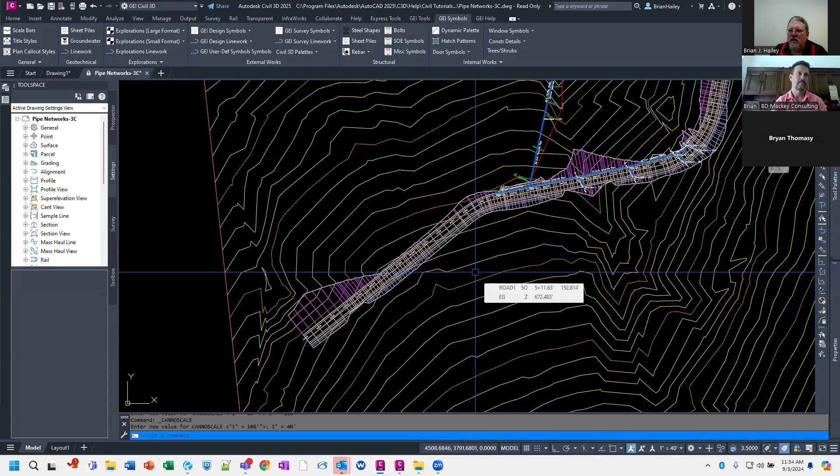So what I thought I would do today is, we've talked about expressions and labels in the past, but I don't think we've ever talked about the ability to create something in a label that does not scale with the drawing scale, right? So if I were to create a label and put a line in the label, that line would scale as the drawing scales. So with labels here, if I change my scale from 1 inch equals 40 to 1 inch equals 80, you can see the text get bigger. But if there was a line in that, it would scale as well. If there was a symbol in there, it would scale as well. And sometimes you don't want that.

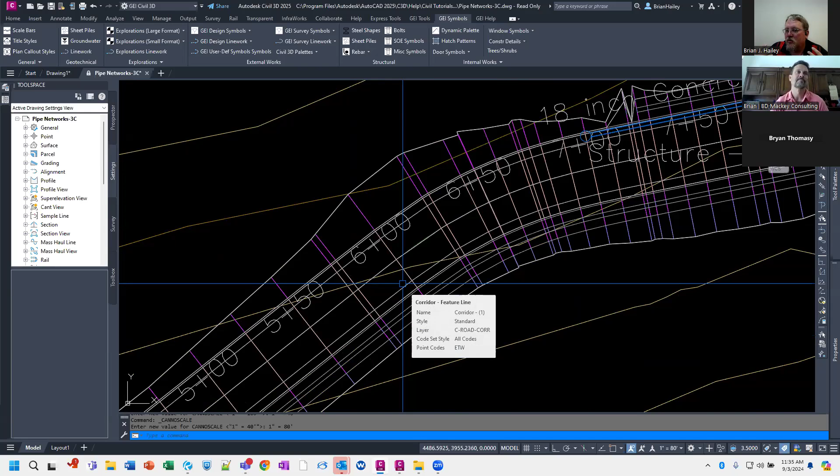So in this example, what I want to do is put a fire hydrant symbol with a line going perpendicular to the alignment. And so this would be like the fire service line and the fire hydrant itself. But the thing is, if I put that line into a label, then it's going to scale with the drawing scale, and I don't want that.

All right, and so if I come over here to, let's see, I haven't actually practiced this. I probably should have done this before. And so label... Practicing is overrated, right? Yeah. So this is going to be a station offset label, right? I'll just go ahead and create a brand new one here. And I don't even know what blocks I have in this drawing. This is just one of the sample drawings that comes with Civil 3D. So we'll see what we've got.

And so the first thing I want to put in is a block. So I'm going to get rid of all this text. I don't need any of this stuff, right? So I'm going to insert a block. We'll call this one hydrant. I probably should have checked to see if we have one. If not, we can always get one.

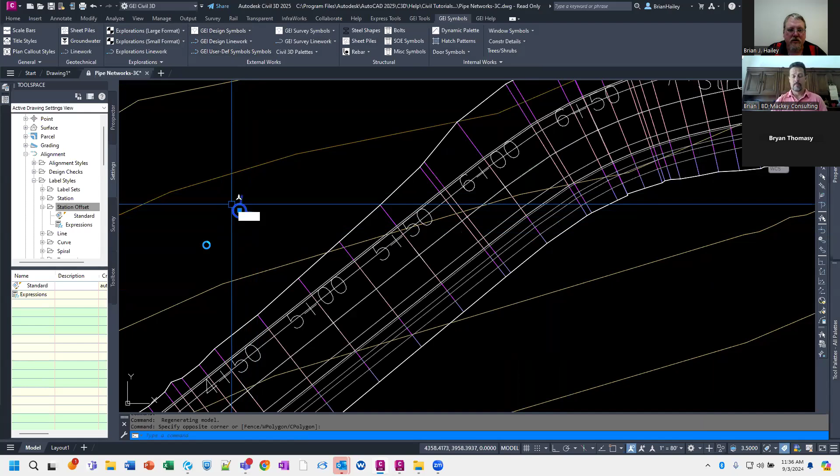And then the block name, what do we have in here? Yeah, we don't have any hydrants in here. Let me pull in one of our hydrants here real quick. Utility symbols, water symbols. We'll just throw a fire hydrant in here. We got a hydrant in here, so we should be good to go now. Now let's try this again.

Let's see the layout. We'll get rid of that. We will add in the block, and the block will be that hydrant. Right. So maybe this symbol I do want to scale with the drawing scale. If not, I could do some other things, but I'm just going to add this scale. But then what I want is a line that goes from the hydrant to the alignment itself. And that's the piece that I don't want to scale.

All right, so I'm just going to go ahead for now and put in just a line, and then we need to figure out what we want to do with this. All right, so our start point is going to be at block 1. We'll do it at the center. Start point anchor. Hang on, I'm doing something wrong here. Visibility. That should be middle center. Oh, insertion point, rather. Use endpoint anchor will be true.

And we can't go to the feature, right? So what I need to do is calculate the length and the rotation. I don't think I need to do the rotation, but I need to calculate the length. So that length is going to be the offset. So for the endpoint anchor component, I'm going to set that to false, and I'm going to put in a length and an angle here. All right, so what does that length need to be? Well, it needs to be whatever the offset is.

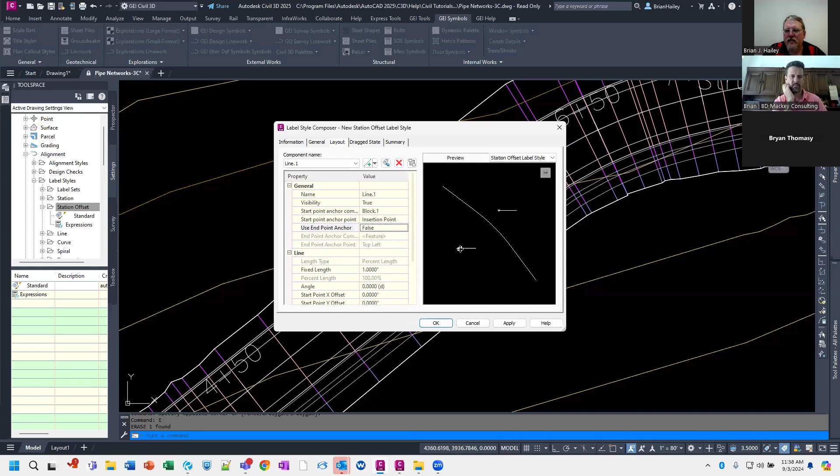So I'm going to go create an expression. Right, and this will be the line length. My expression is going to be whatever the offset is, but then I need to account for the drawing scale. So I'm going to put in the offset. So this will be the alignment offset. And then I need to multiply it by some factor that will keep it the same length all the time.

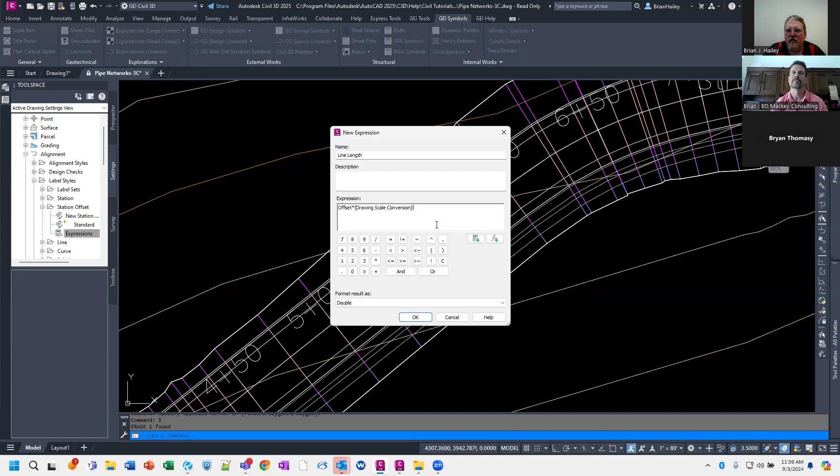And what that is, is the drawing scale conversion. So basically what happens is you have an object, it scales it up based off of the scale, and then this will scale it back down based off of the exact same scale. So that's the drawing scale conversion, and I think it's a multiply by. All right, and then hit OK. And let's just go ahead and try this.

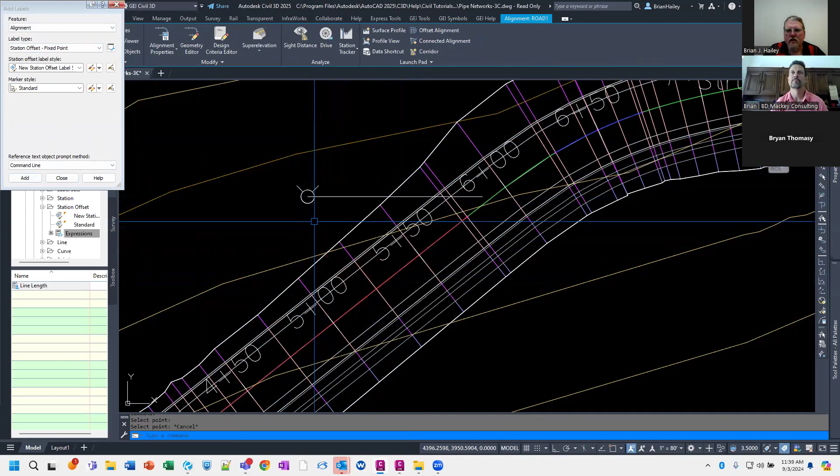Let's put in an alignment label here. So we'll go to annotate, add labels. We'll do a station offset fixed point, and we'll use that new label style I just created. Select the alignment. There it is. Okay, let's try this again. All right, and so you can see the length of this line here, but if I change the drawing scale, say to 1 inch equals 20, it scaled with it. It shouldn't have scaled. Why did it scale?

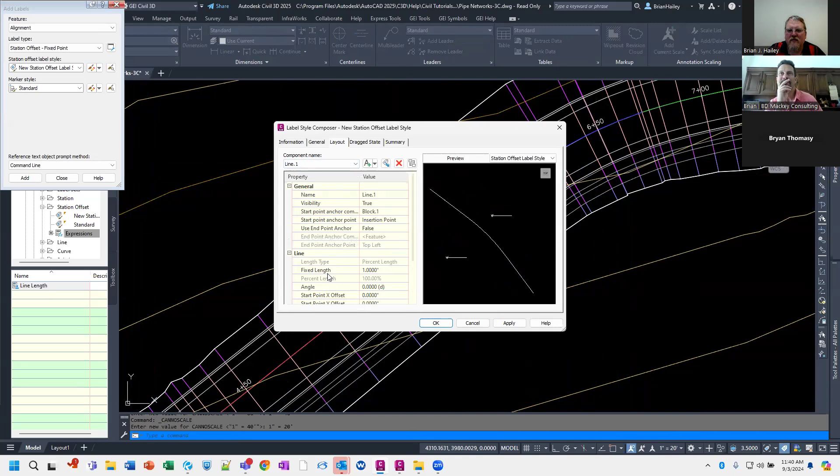What did I do wrong? Maybe it's that I never used that expression for the length. Oh. I created the expression, I just never used it. So on that line, we have the fixed length. We're going to use that expression, that line length. And that seems to be a bit off as well. Yeah, I think it was better, but just a wee bit off. Maybe it's not multiply by.

Just a smidge. So what I like to do is I like to explode that and then move the line. Just kidding. Maybe it's divide by.

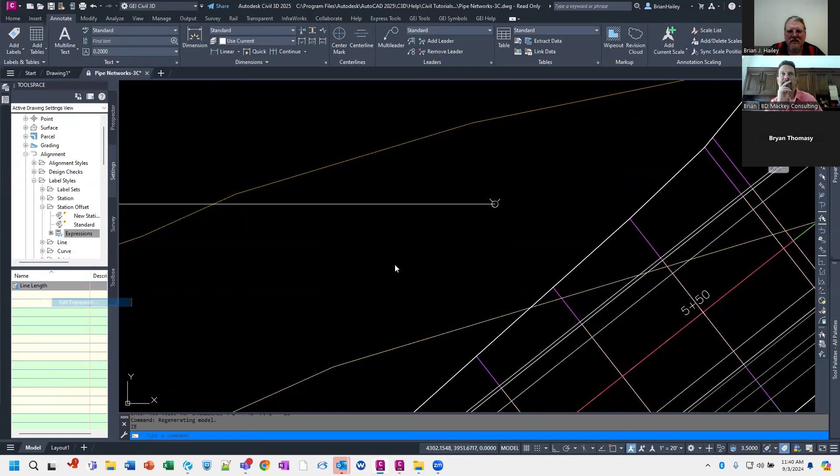I'm curious as to where you're headed with this. Like I said, it's been a while since I've done this, and I wish I'd done this beforehand.

Yeah, there we go. All right, so if I change the drawing scale, say to 1 inch equals 60, you can see that line length stays the same. Right, and so I can have this go to that line. I just need to calculate that length. And so if you need to put something into a label that doesn't scale with the drawing scale, this is how you do it. Right? So it's not multiply by the drawing conversion scale, you divide by the drawing conversion scale.

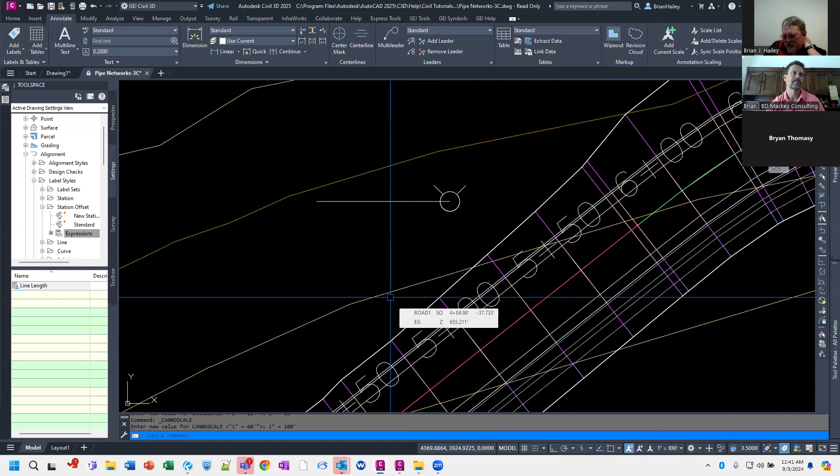So this is one example, but it's kind of hokey. Who uses alignment labels for fire hydrants? It may be in a unique situation. But one thing I like to do is I like to do this for my pipe labels, right? So I've got this pipe label, and you can see at a 100 scale, this text just goes out beyond the limits of the pipe. What I want is I want this text to always be on the pipe.

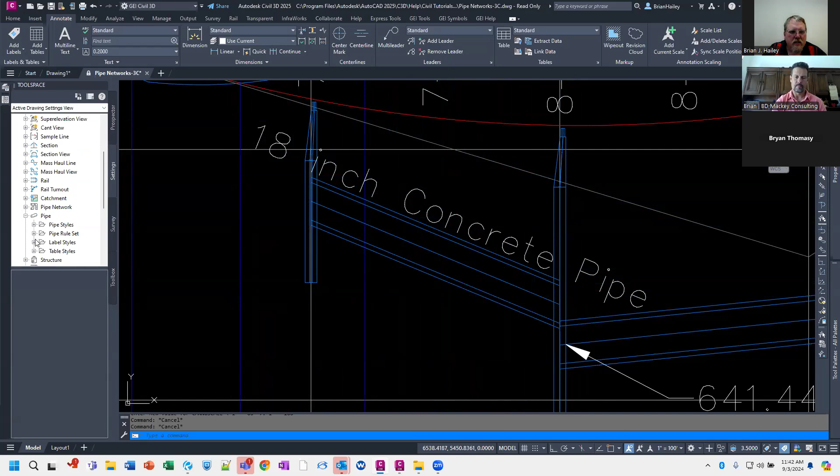And so within the pipe label, let's go find the pipe label here. Pipe, label styles, plan and profile. I don't know which one this is using. Probably should check that first. Standard. Standard. Gotta love standard. All right. And so with the pipe label, there's this option for maximum width or something like that. Where is that?

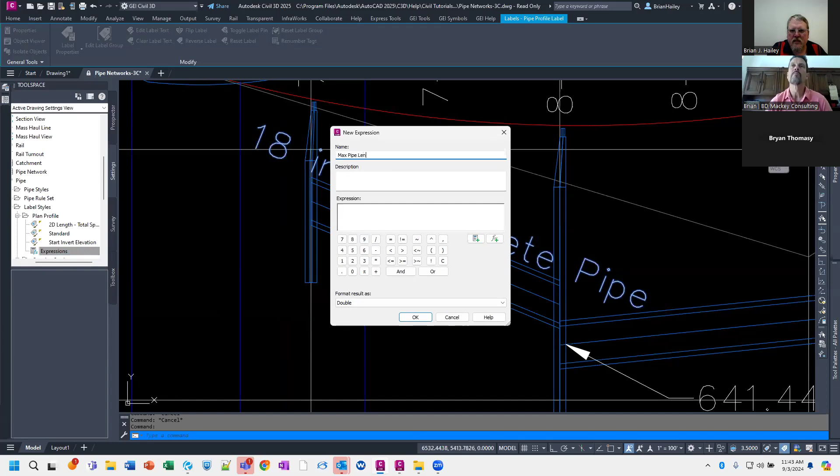Maximum width here, right? And so what I can do is I can say, hey, I want the maximum width of this text to be whatever the length of the pipe is, right? I don't want it to go beyond that, but it can't scale with the drawing scale because the pipe itself doesn't scale with the drawing scale. And so that's where this can be used. So I'm going to go create a new expression here. We'll call this max pipe length. My expression will be the 2D length, or we'll go 3D length to inside edges. And then we will divide that by the drawing scale conversion factor.

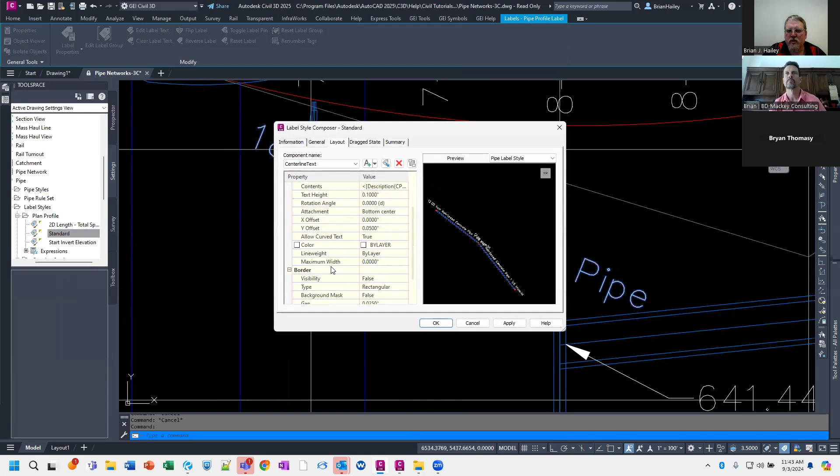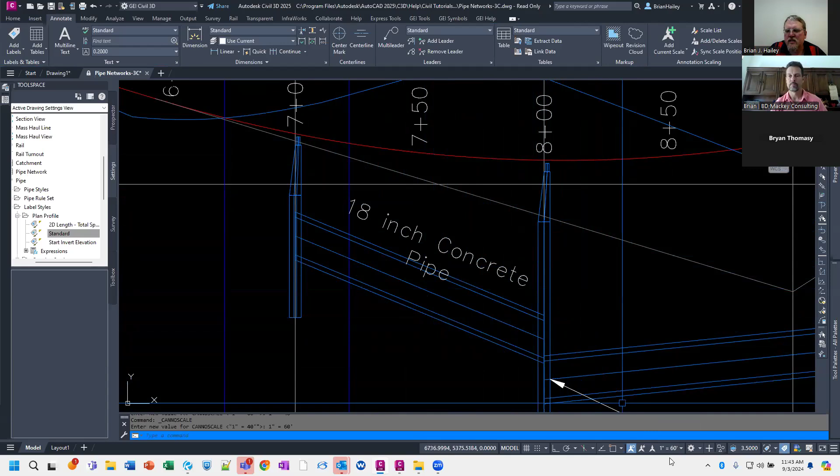And then I can use that in that maximum width. And there it is. So it's always going to be within the pipes. Now, if I change this down to, say, 1 inch equals 60, you can see it's still word wrapping, but it's word wrapping within that. If I change it to 1 inch equals 40, it's completely within there. If I change it back to 1 inch equals 60, well, the pipe was going to run into the next piece, so it put it down on the next line. Change it to 1 inch equals 100, and it continues to word wrap differently because that's the maximum length it can reach.

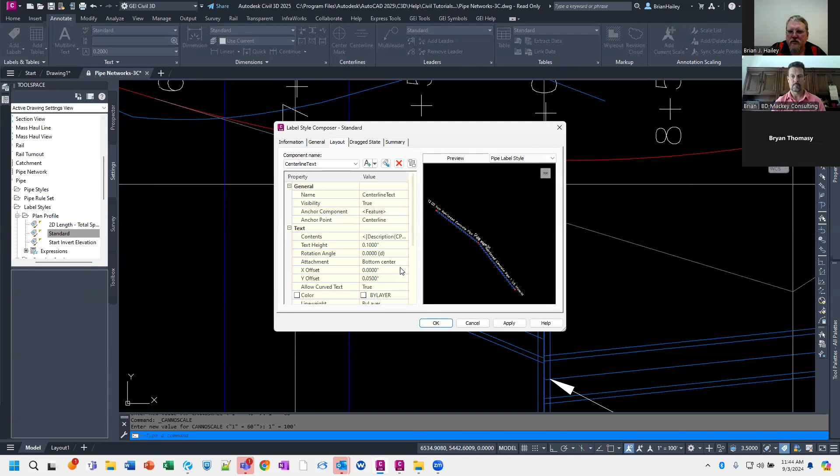So that's what I kind of had for today, this concept of the drawing scale conversion that you can use in your label styles. All right, so again, that's in the expression, sorry. And it's just a property here that is the drawing scale conversion. And as far as I know, all of your expressions will have this as an option. I've yet to see one where this wasn't an option. So you can always use this in there as well.

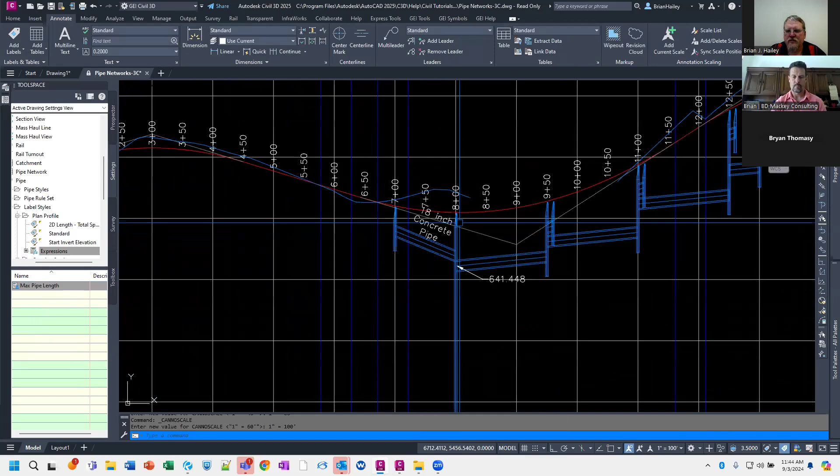So, over the years, I've been watching you show all these expressions and stuff. And one, I'm jealous Revit can't do some crap like that sometimes. But B, I always sit there and wonder, when a new Revit user or a new Civil 3D user comes in, how over their head all of this is. Does it matter because they just come in and start using it, because the template's set up and you're all good to go? Or have we really got to start showing the average users all of this? I think this is more for the CAD manager.

People that are here for Civil Chat are probably getting into later in their career within Civil 3D. There's probably not a whole lot of brand new users here. But if nothing else, I like to at least show this so people realize that it's an option. They might not be able to go out and do it today or tomorrow, but then they'll run into a situation and think, oh, Brian said something about that, let me go investigate that a bit more.

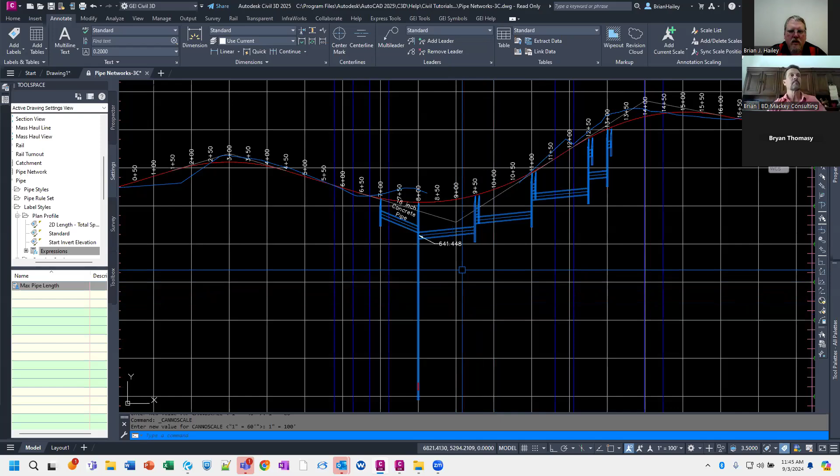Right. And Thomas had a follow-up on this, saying, can that hydrant example be rotated to be perpendicular to the alignment with the expression? Yes, it can. I just don't remember exactly off the top of my head how to do it. Oh, and yes, if I do move this further away, you'll see that line lengthens because that's based off of the offset. So I just need to figure out what the rotation is. Let's see if we can do that real quick.

You only have two questions. Yeah, I know. I just realized that. I think I've got time.

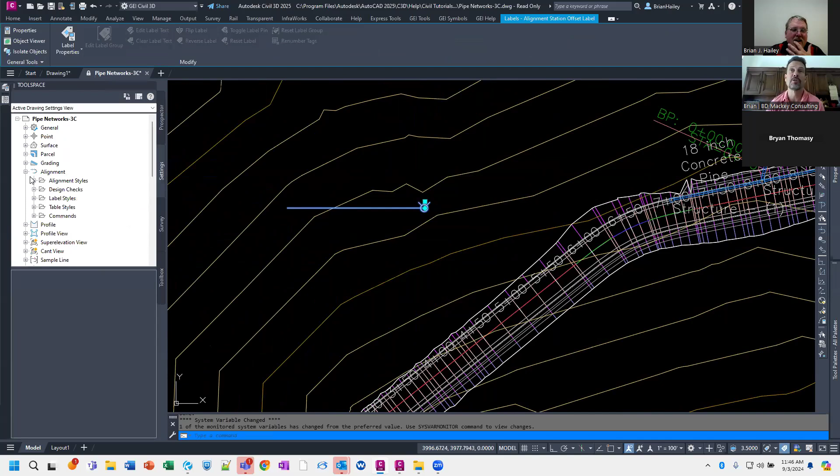Station offset was this one here. So the expression, we'll call this pipe rotation. Let's see what properties we have. We have the instantaneous direction. I think this is what we need. Let's just try that for now. And then I will put that in for the rotation angle of the line.

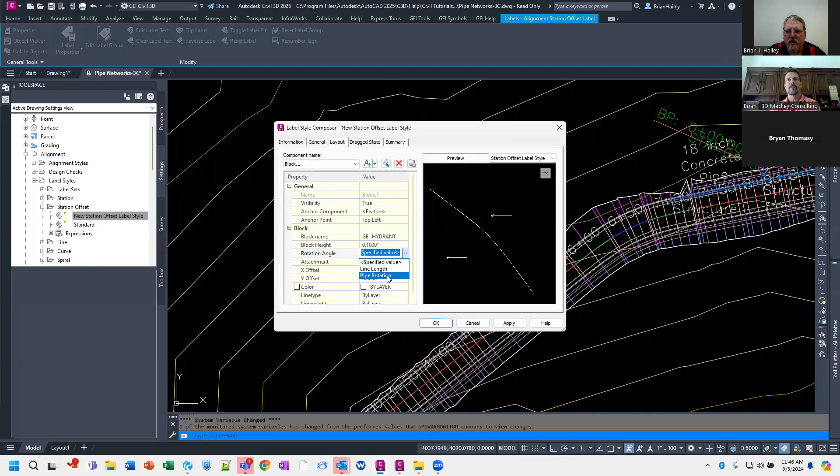Well, the line has two points, does it not? So you can actually tag the point to the offset position so that way it would rubber band in and out, if that's what you're looking to do. Because I've done that with text in a label that needs to be underlined and also have the leader connected to it. I'll connect a line that will rubber band to the width of the text, so it'll always be underlined the correct length instead of having to calculate a length.

Yeah, absolutely. But what do I anchor it to? The alignment itself. Right. So I choose feature, and then... oh, there's nothing there. Yeah, there's nothing there.

Well, that's terrible, Autodesk. I mean, if we can think it, they should have already done it. Right?

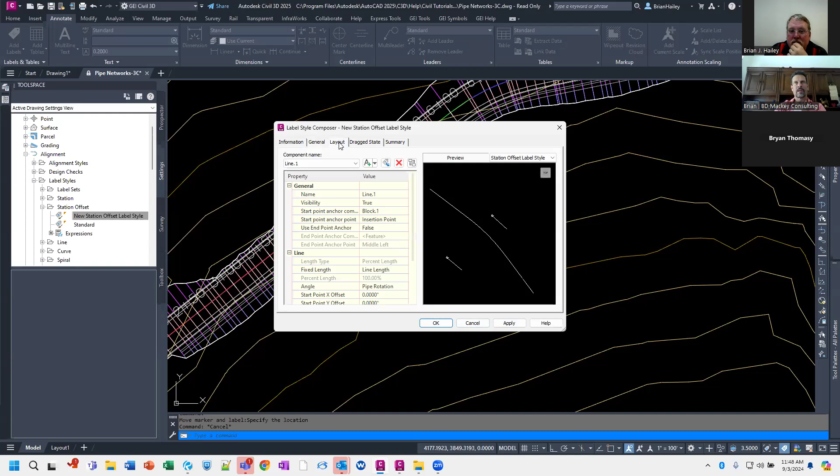So Joe had a suggestion saying he thinks if you set the style orientation to the object, then the rotation is 0. That sounds right. That could have been how I did it. Orientation to object, and then the rotation would probably have to be like 90 or something like that. He said 0, but... Line rotation should be 90. Let's see. No, that didn't work. Feels like that's based on the view. Yeah, it does, doesn't it?

Oh, and Adam says you do not use the end anchor, but you can set the angle and length. Right. But having to calculate that every time would be kind of... I mean, if everything's the same distance. If I set that to 0, see, it's just going straight up. The style orientation, not the component. Right. But I've already set the style rotation to reference the object. I don't remember how I did it.

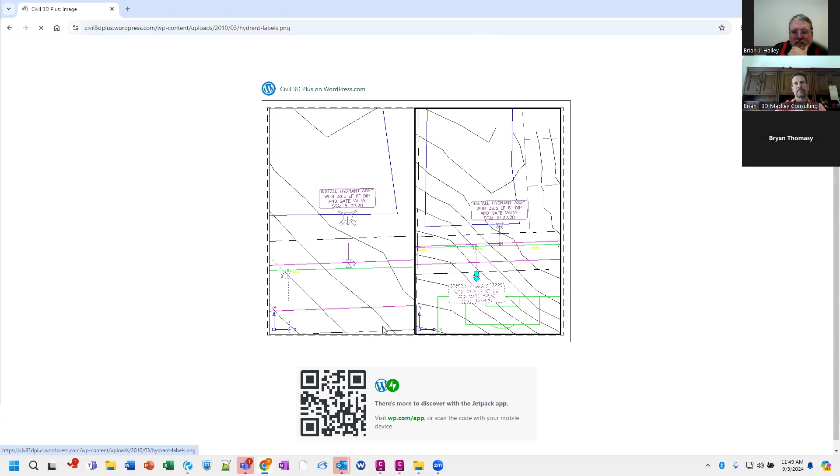I guess you're gonna go to your own blog and find out how you did this. Yes. Oh, I know I've done it. I just gotta find it. Thomas suggested the plan readable option, untick it and make it off. Yeah, you can see this is exactly what I was doing here. The question is, what did I do? There you go. I wonder if this link even still works. Can't load this file type. Download it. I don't want to log in or sign up. It's been so long since I've messed around on my blog.

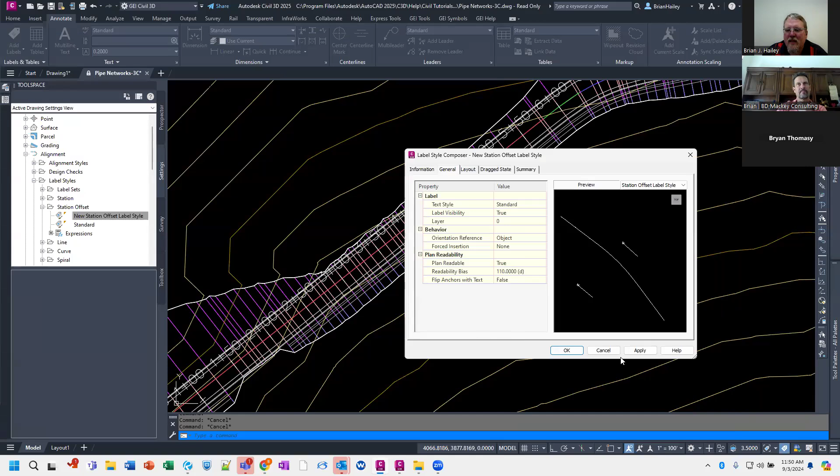So my blog has one that says labels with text that doesn't scale. You're kidding, right? I know, it was 14 years ago that I did this, so forgive me for not remembering. But you can download the block and see how I did it. But yeah, so that's what that drawing to scale conversion is.

So Sean does have a question about labels. Can you show us how to make a new label for various items in Civil 3D, since you're already talking about labeling? That's a very broad question. Anything in specific, Sean? Because I can show you how to create a new label. I just right click on station offset, choose new, and I've got a new label. There. Now, what do you want the label to do?

Like making grading plan for spot elevations. Sure. Let's see. So if I want to create a new label style, I'll give you tips and tricks on label styles. How's that? So we'll do a spot elevation label. So I'll go to my label styles, spot elevation, and I'll just create a new label style.

So I'll quickly go over some of this stuff. So information, give it a name. All right, we'll call this one, I don't know, civil chat. Who created it? You can edit the created by, right? So if I was creating this for GEI, I would say GEI, and then last modified is your login name.

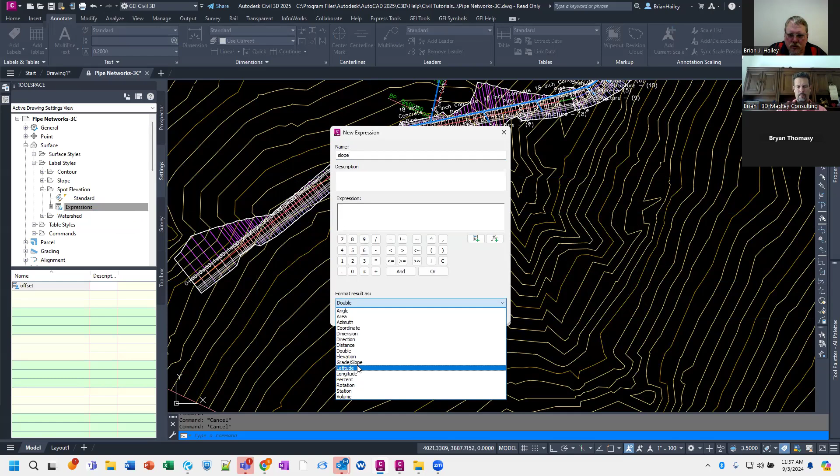So when I create an expression, let's go ahead and create two expressions. I'll call one offset, and I'm going to format this as a station because this is like for an alignment. And I need to actually put in something for the expression. We'll just put a 1 in there as a placeholder. And we'll call this one slope, and we'll format it as a slope. Grade slope. Now I need to put something in there.

So now when I go into my contents and I add an offset in here, you can see we get station stuff, right? How do you want the station value to be? If I were to change this to my slope, this is now the grade. I want it to be percent or rise over run or run over rise, the different formatting of grades. One of the important things to remember is you always want to make sure to set the format results properly, or it won't show up in your label as desired.

Thomas says, good info. We have 0.00 and 0.0 spot elevation styles for hardscape and dirt using two different styles. Also handy for TC/BC and TW/BW labels, curbs and walls. Right. So that's a great segue there, Thomas. So something you can do.

So I can create a new label style here. So this will be the standard 100th of a foot label, right? So this will be elevation. It doesn't let me put in a right to the 100th.

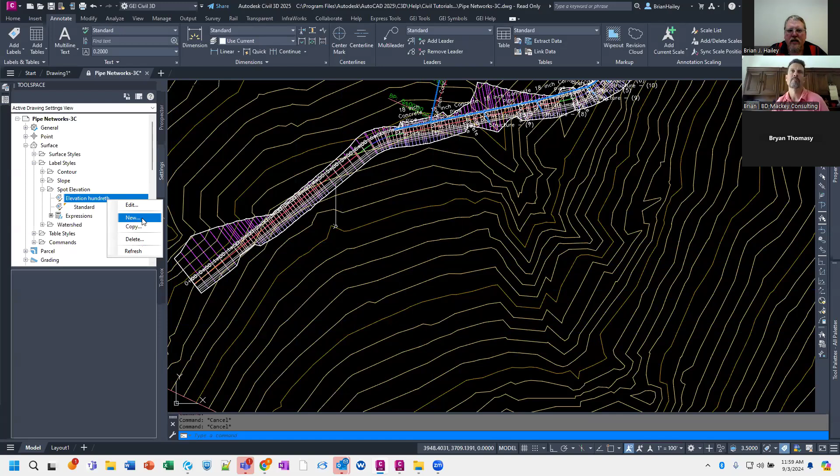And so in this particular one, I'm going to have it out to the 100th. Now, what I could do is the same thing again and create a new label here, and this would be the elevation 10th or whatever. But I want this one to be exactly the same as the 100th, but for one thing to be different. So rather than creating a brand new style, I can right click on the style and create a new child style.

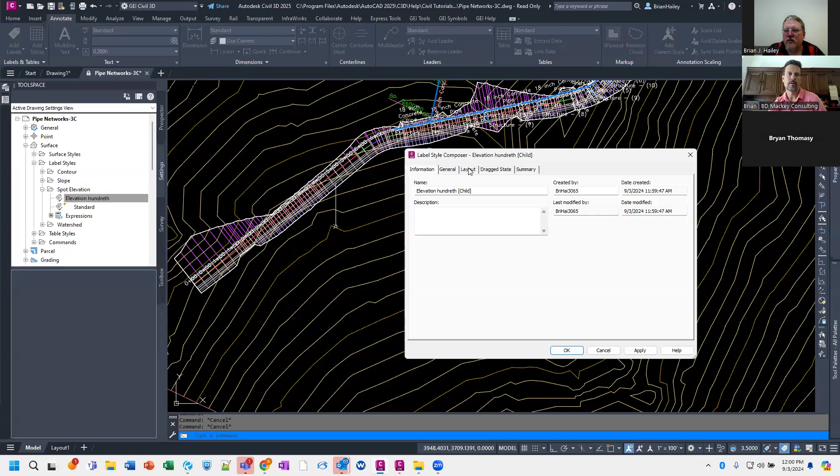The way the child style works is it will inherit all of the properties of the parent. So if the property of the parent changes, the property of the child changes too, unless I override it at the child. So here I'm going to go into the layout, and I'm simply going to change this component to the 10th. And apparently, I did not change it for the 100th. Don't forget to hit the stupid little unlabeled white arrow. I can't believe nobody called me on that one.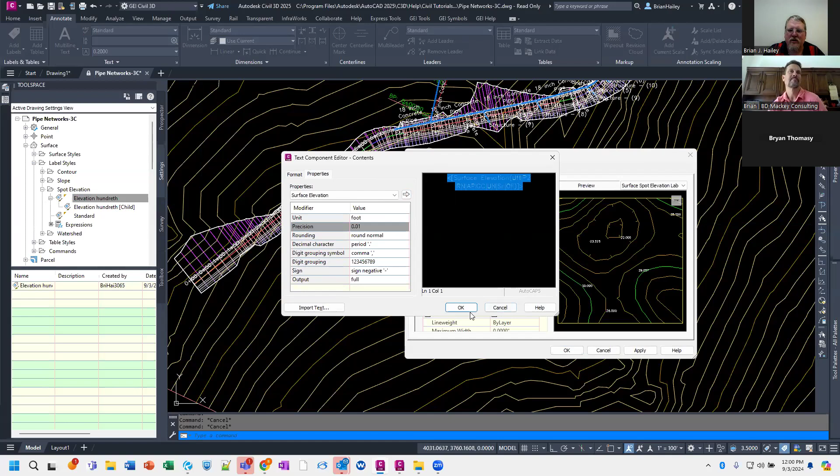This one right here. I'm constantly forgetting to hit the stupid little... Oh, got to push it over. Yep. So you're not alone, Brian. I think that is probably one of the weirdest things they did for us, but yeah.

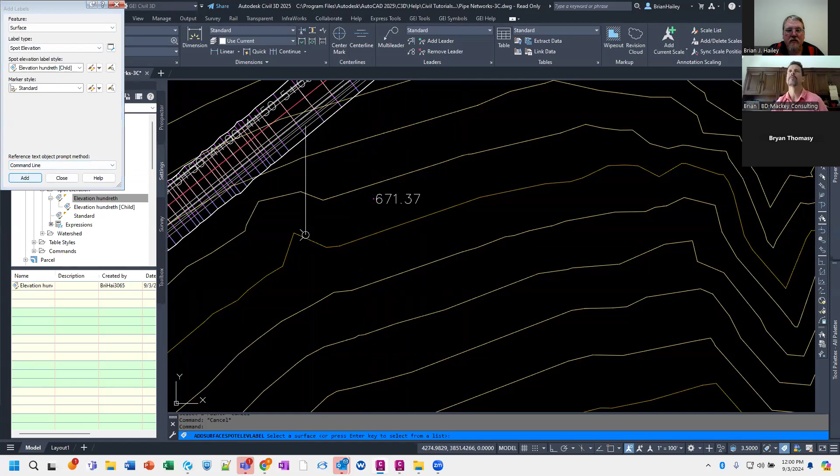So let me go ahead and label both of these. So I'll go to annotate, add labels. This will be a surface. This will be a spot elevation. And we'll start with the 100th. All right, so there it's out to the 100th. And then I'll throw one in at a 10th. And there it is, right?

Now, if I change a property of the parent, let's change the text height. So I want to make it twice as big. So instead of 0.1, I want it to be the text height of 0.2. You can see they both change because the child inherited the property from the parent. Now, the only property that the child has is the precision, right?

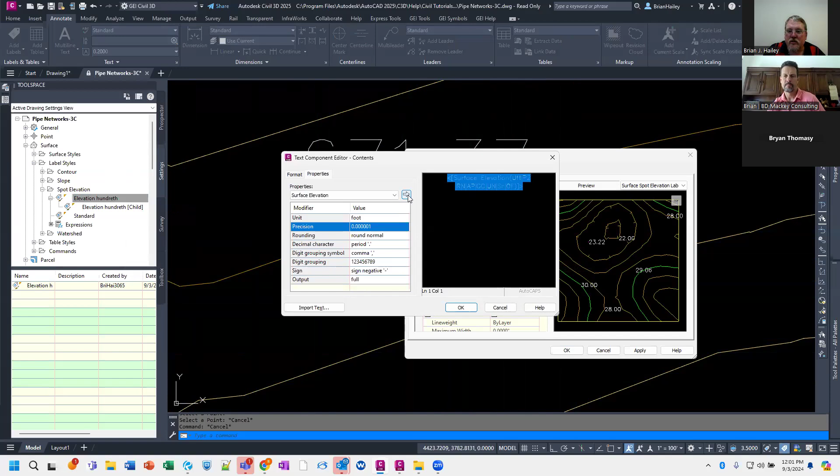So if I go edit the precision of the parent, we'll change it to something ridiculous. Hit the stupid little unlabeled white arrow. You can see the parent changed, but the child didn't because the child owns that property. So this is a great way of maintaining consistency among your labels. So if you need to make a change, you don't have to change them all. You just change the parent and it propagates through them all.

I know there's several questions coming in about this, but I did want to ask you really quick, because this goes on to the expressions and such, and maybe this is something we can save after the questions, but I have an eternal battle with everybody when it comes to significant figures. Whenever you're doing civil drawings, typically you go to two significant figures. In other words, two figures after the decimal. However, people like to do two places after the decimals on a slope, which is actually already two decimals in.

And so in small areas like handicap ramps, when you have like 0.5 feet of differentiation, that significant figure truncation that's native already in Civil 3D will show you the correct slope, and the point labels are incorrect because it truncates it or rounds it. And I've gone rounds and rounds with individuals about significant figures, but there is an expression that helps that. I don't know if you have that, Brian. Is there an expression that helps with that?

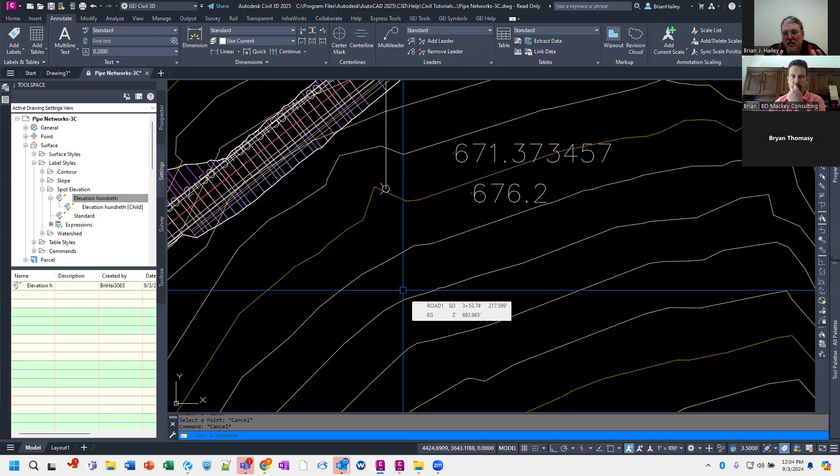And so what you can do is create a new expression for the slope label. So let's go take a look at that. If I come in here to slope, we'll create a new expression. The properties that we have for a slope label are the elevation of the first point and the elevation of the second point. Now, I don't want the elevation of the first point. What I want is the elevation that's labeled at the first point, right?

And so my slope is going to be, this one here's your properties. We're going to round the surface slope elevation at the first point, minus the surface slope elevation at the second point. Right. And so that's the run. No, that's the rise. So that's your rise. And then we're going to divide that whole thing.

Divide that by the same concept, right? We're going to divide that by the round. By the way, y'all, I just posted that in the chat for anybody that wants it. Round the surface slope distance. Yes. Right. So something like that. And I might have the formatting or the parentheses wrong, but that's the idea.

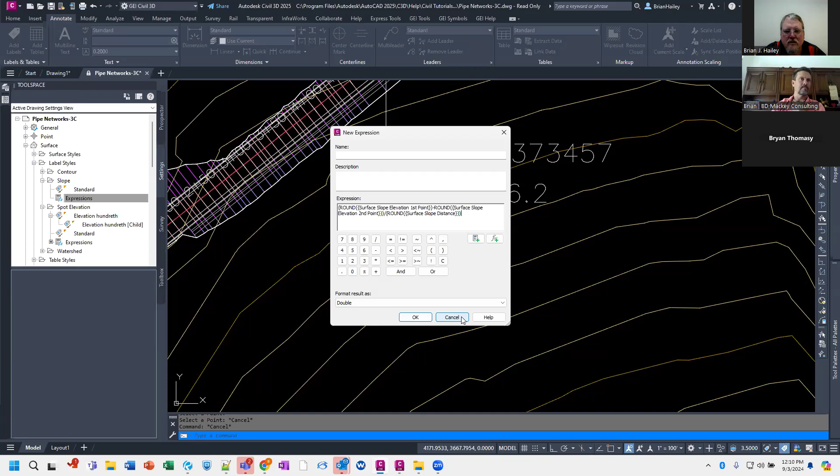Oh yeah, you can do that. You want to take this one, Brian? I don't know if I can share, but I can talk the way through it because there is where you can do a ref. So if you go into your surface labels, let's just do a spot elevation. Which is where I just was. In the spot elevation, you're able to go in there into the layout and actually, you got it, reference text. I love these guys. Now, this will give you the referenced information, but you can run that into an expression, I believe.

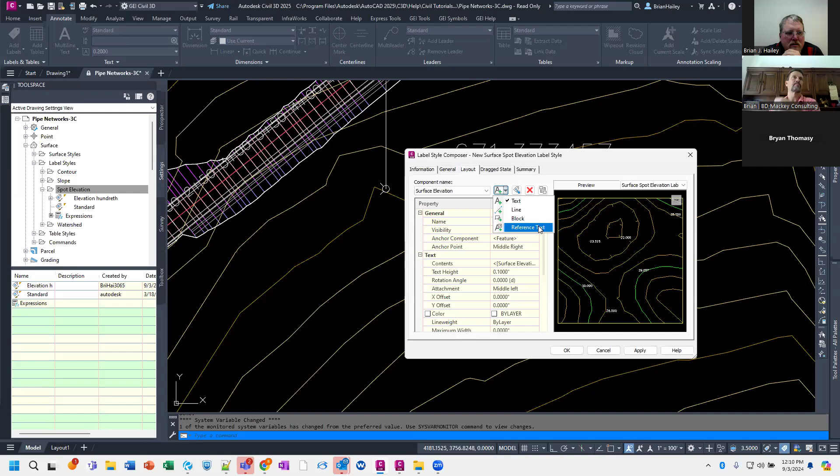Or can you not? Because I don't think so. We can't subtract through that. You can give both elevations at the exact same point using a reference text, but it's not going to give you the subtraction of the two. But I think what Mike is wanting, Mike, correct me if I'm wrong. So if I have a wall that's running here, one side of the wall is going to be at one elevation. The other side of the wall is going to be at the other elevation. And you want the difference between those two. Is that right, Mike?

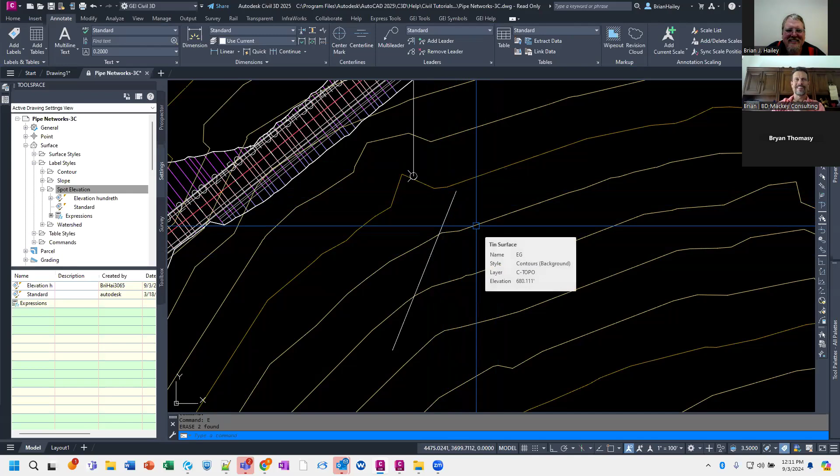Yes. Okay. You could do a comparison surface and label that comparison surface. But he wants to compare 2 different locations on the same surface. Well, what I meant was if you do an isopach or a volume surface. There it is. Go for it. Okay, got it. I saw the lights go on. Don't use a spot elevation label. That's right. Use a slope label. Yep, because it'll give you the differences in the elevation.

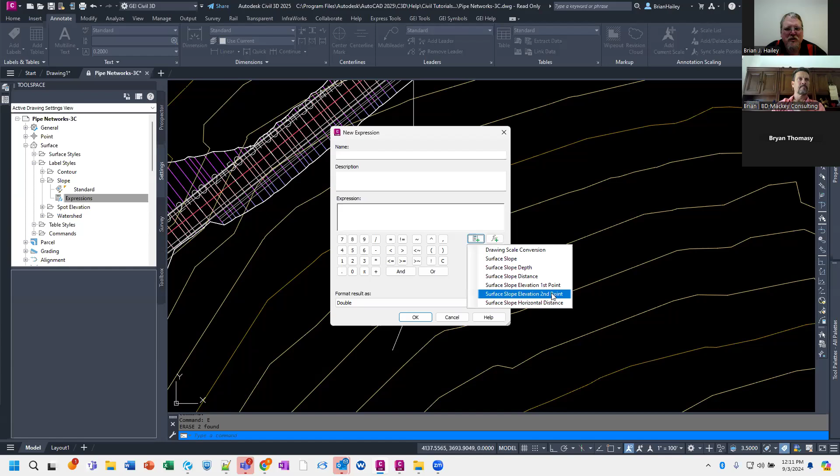Yep. So with an expression within a slope label, what you have is the surface slope elevation first point, surface slope elevation second point. You can use those in the expression to calculate the difference. And then you just make it look like a spot elevation label on the one side of the wall. And Greg put in that exact formula in chat. Well, he did the comparison between the two. What Brian was showing was actually the difference. So you could take surface elevation 1, subtract it from surface elevation 2, right? But no, that still wouldn't work because it's on the same surface.

Right. So, for example, I'm modeling a wall. The same surface has the bottom of the wall over here, and then offset has the top of the wall. And he wants to get the difference of two different locations on the same surface. Now, yes, that's right. For the difference of two surfaces, you would need to do a volume surface and then use that. But if I'm trying to get the bottom of wall elevation over here and the top of wall which is horizontally offset, then I would use a slope label. You can then calculate the elevation difference, or you can just put in the bottom of wall elevation and then the top of wall elevation, and just make it look like a spot elevation, even though it's a slope label.

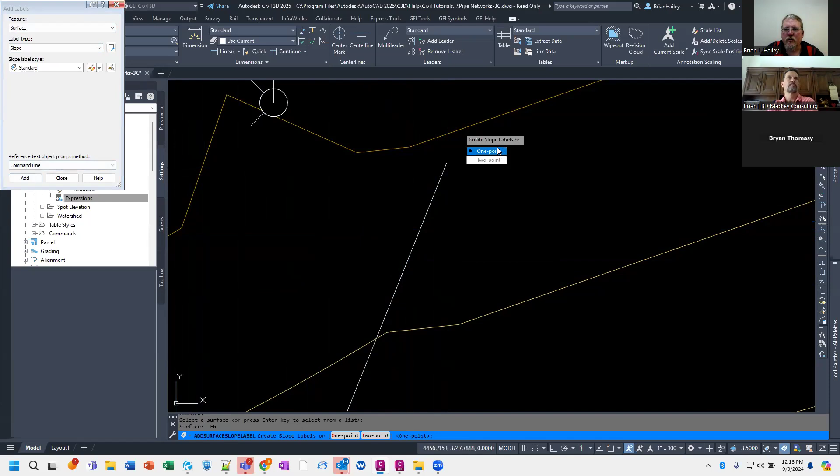Yep. And the only thing you would need to make sure is that you're tagging exactly the feature line at the bottom and the feature line at the top, or your corridor, however you're generating it. So your slope label needs to be very accurate for sure. Right, so if we go surface. That's why I turn on the triangles, because I can snap straight to the triangle and not have to worry about it. So you want to do it as a 2-point label, and I want to label from the bottom of the wall to the top of the wall, and then that would give you the elevations of the two of them, assuming that it's set up correctly. Yep.

So John put in a chat, another option: draw a line from bottom to the top and label the line with starts and ends. That would work, provided the design never changes.

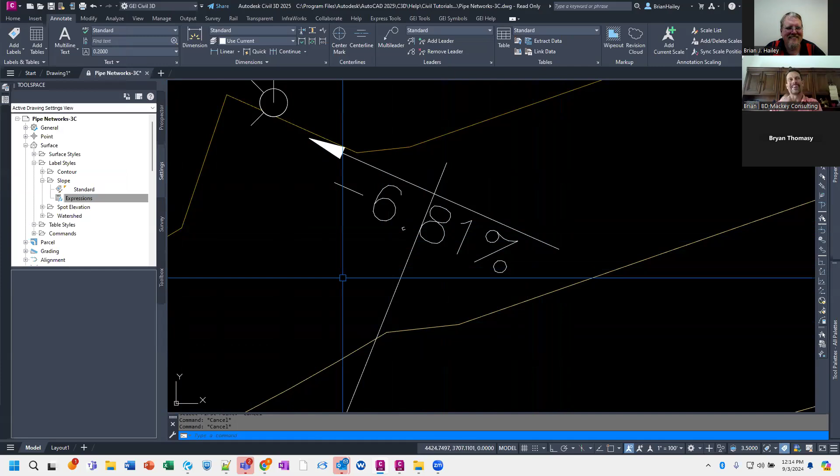That never happens. Yeah, designs are static, never. Once we design them, nothing ever moves. I have no idea why this is a problem. All right, good conversations.

And then I think the great thing is Sean's like, cool, you got all these labels set up. What's the quickest way to transfer them from one drawing to another or update your company's template? Okay, so let's talk about moving styles between drawings. There's a couple of different methods.

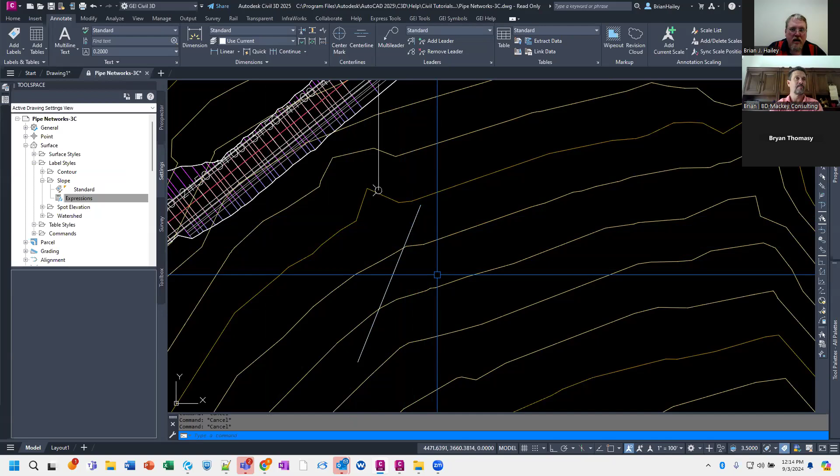So what I'm going to do is I'm going to start a brand new blank drawing that has nothing in it, right? So I'm just going to come over here and I'm going to choose open with no template Imperial because I'm in the US and we're backwards from the rest of the world.

Someday we'll change, please. There's two countries that use our units, including ours. Yeah, including ours.

It always takes a long time to open up a drawing this way or create a new drawing this way. I'm not sure why. But when we do, Civil 3D has never seen this drawing before, so it goes through and it creates all those lovely standard styles. So the only styles that are in this drawing are the standard styles. Now I've got my drawing template and I want to bring some labels into this. So I think drawing 1 was probably created from our template. Let's go take a look here.

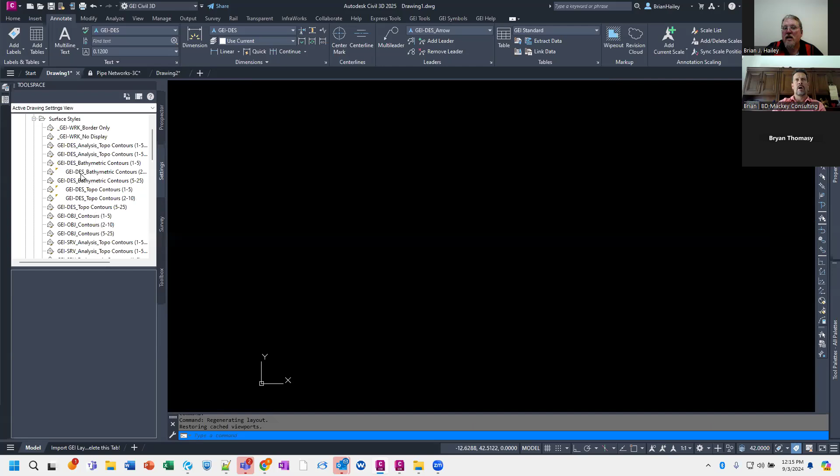Yeah, so you can see this drawing 1 here has all my styles in it. And I want to take some of these styles and bring them into drawing 2, which doesn't have any of our styles. All right, so easy way to do that. So here, let me just put a piece of text in here. We'll call this one target. Just so we know that, hey, this is where we're dragging the styles into. So I have the target drawing open and active.

Over here, I'm on the settings tab, which is where you access your styles. I'm going to change this to master view. And when I change it to master view, I can see all of the drawings that I have open. All right, and I want to take a style from drawing 1. We'll just go a surface style. I'm going to take this one style and simply drag it into the drawing. And that style is now in my drawing.

So if I change this back to active drawing settings view, surface, surface styles, you can see I now have that one style in this drawing. Now, if I want to do all of those surface styles, I'll change this back to master view, surface, surface styles, oops, wrong drawing, drawing one, there we go. I want to bring all of these styles in. What I can do is I can drag the folder the styles are in into the drawing. So I can take this entire folder, drag it into the target drawing, and it will bring them all in.

Now, it already had one of the styles in here, so it's asking me, hey, what do you want to do? Do you want to overwrite it, rename it or skip it? So overwrite, I want to update the style in the drawing with the new settings. Rename, I want to keep the old style in the drawing, but I still want to bring in the new style. It's going to give it a new name. Or skip, I want to leave the one that's in here alone, and I don't want to bring in the duplicates. So I'm just going to choose overwrite.

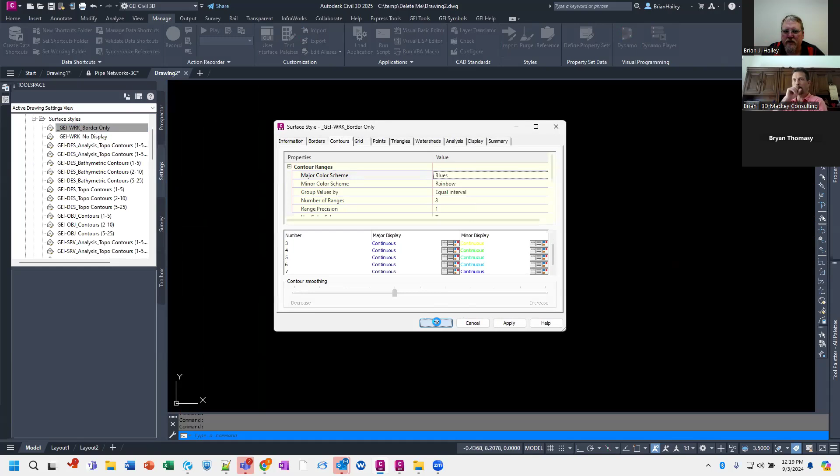And actually, what I should do before I do this is make a change to one of these. It should also bring over the expressions if your styles have expressions. Yes. So I'm going to make a change to one of these styles here real quick. We'll do blues on that one. So this style has been changed. Again, I have to save the drawing, and then I can import it.

Okay. So Jason and Corey tend to think that this is not going to work with styles that contain expressions. It should work. Pretty sure I've done this with expressions. Yeah, you didn't put should. Now I've dragged styles over, not using this method, and it pulled the expressions with it. I wouldn't expect this to react any differently, but hey, let's check it out. Yeah, let's find out.

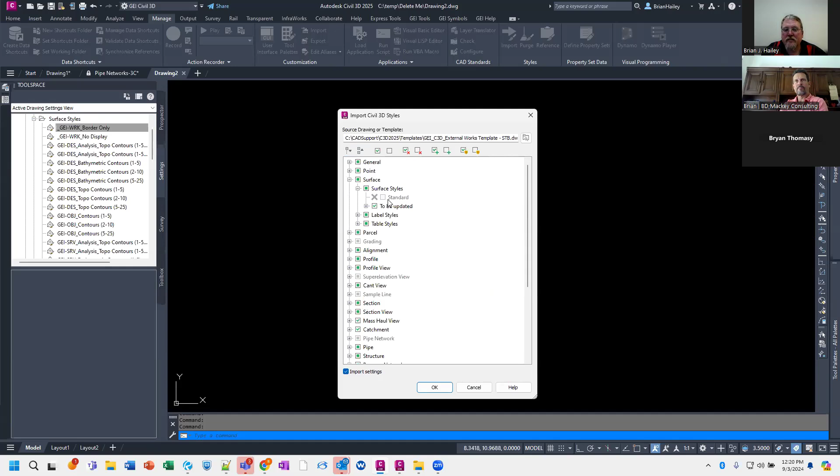All right, so I got 3 different categories. So if I come down here to surface styles, and then let's come down here to label styles. So I've got 3 different categories, really. I've got the to be deleted. So you can see this standard style is in my drawing, but it's not in my template. So I can delete it. Now, I can't toggle this on because it's being used, and therefore I can't delete it. I have the to be updated. So the to be updated are styles that are in both.

So the to be deleted, let's go back to here. This style is in my drawing, but not in my template. So I'm importing from the template into the drawing. So it's a non-standard style, so I can delete it. The to be updated are the styles that are in both files. So it's in my drawing and my template. So I can update the style that's in my drawing based off of what's in the template.

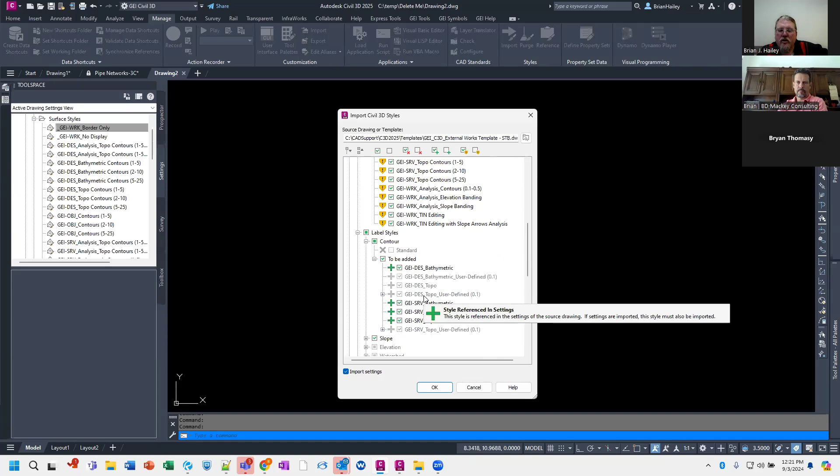Right? And then lastly, I have the to be added. So the to be added, it's not in my drawing, but it is in the template. So it will bring that in and just add it to the drawing. And I suppose there is a fourth case, if we want to round out the whole choice option, the style is not in the drawing and it's not in the template, but I'm not sure how that would work.

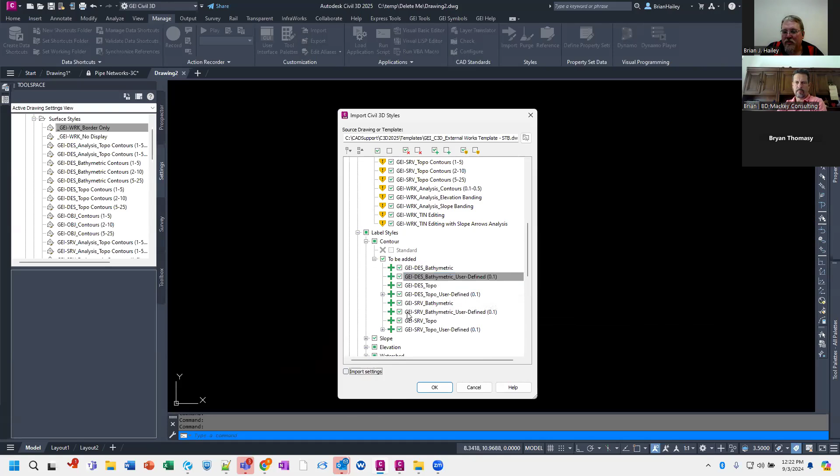Right. Now, if you notice under my import, I can't uncheck this style. I can't say don't import this style. I can uncheck this one, but I can't uncheck this one. And the reason is because this is the default style for some command. And the reason it's being set is because I've got the option import settings on down here at the bottom. If I uncheck that, then I don't have to import those. But because I'm importing the settings, which say this is the default style, it has to bring it in.

All right, and so I hit OK, and then OK again, and then it will import all those styles into my drawing, and then it'll tell me how much work it's done that I didn't have to do, which is really nice. Now, before somebody else asks a question, what is that import settings? What is that settings that it's trying to import?

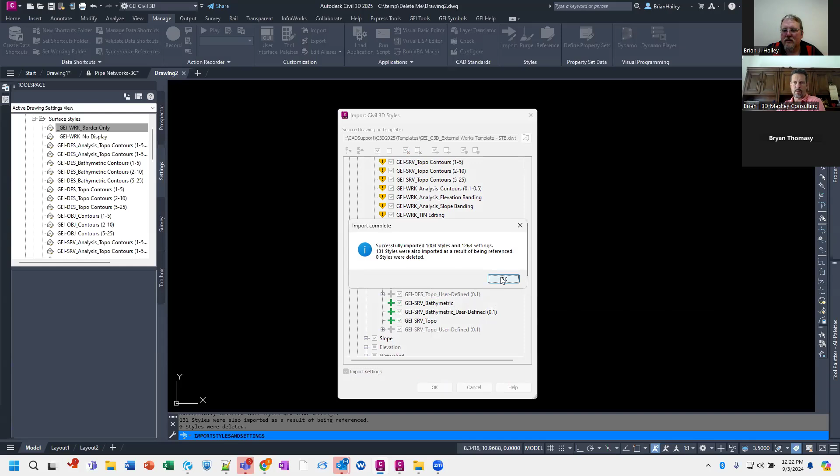So that's a great question. I'm not exactly sure what all the settings are, because it doesn't do all settings. If I go to the edit feature settings, it's these types of settings. If I go into the drawing settings, it's most of these types of settings, right? So these ambient settings.

One thing it does not bring in is the object layer settings, which is really annoying. I can show you how to do that though. Yeah, I can never remember. You've shown it to me so many times, and every time I do it, I'm like, now what do you have to do? You have to do the one thing and then change it, and it's like a bug that I don't want them to fix.

If you go to master view. So if I'm in the drawing that I want to match, drawing 2 here, if I go to the object layers, everything's on 0. So hit cancel. Now go to the drawing that's made from the template, and don't actually go to it. Right click on it and go to edit drawing settings.

So I'm still in the target drawing. Yep, you're still in the target drawing. Edit drawing settings, and now just hit OK. That's all you have to do. Now go back to drawing. Isn't that weird? That can mess you up so bad. Somebody that doesn't understand could accidentally do it in reverse, so be very careful.

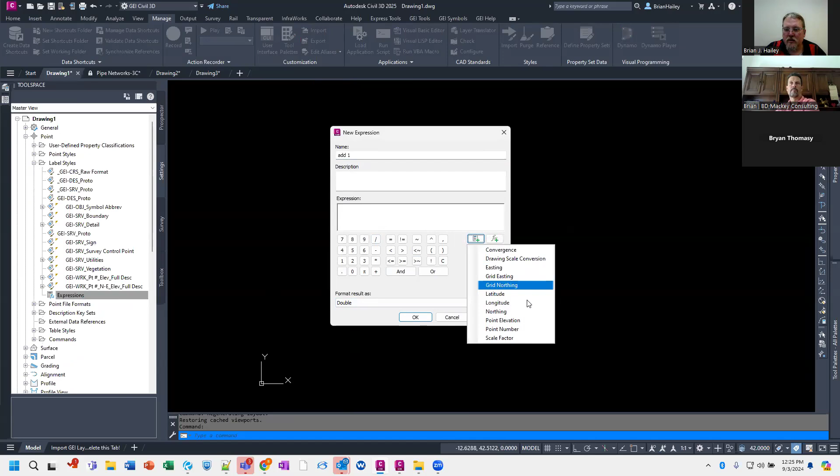Now let's test it. Let's go into label styles, and I'm going to create an expression called add 1. This will just be the point elevation plus 1. It has to be used in a style, so we will add 1, put it in there. So it is now being used. Do a save on this.

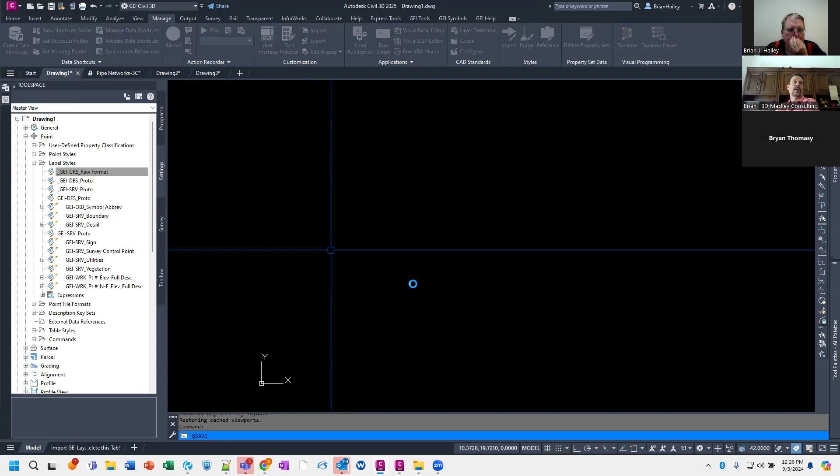John Mayo said when it's used in a style and you use drag and drop, the expressions will work. Right, but what about the import? Or if you just have expressions that you haven't added to a style, will the expressions come across? I don't think they would. That was drawing one. Make sure to bring everything across. There it is. So yes, it does bring the expressions across. As long as the expression is being used in a style, it should come in.

Any issues importing styles from one version of Civil 3D to another? Not that I'm aware of, not with recent versions. If you're going backwards to an unsupported or non-backwards compatible version, you wouldn't be able to do that.

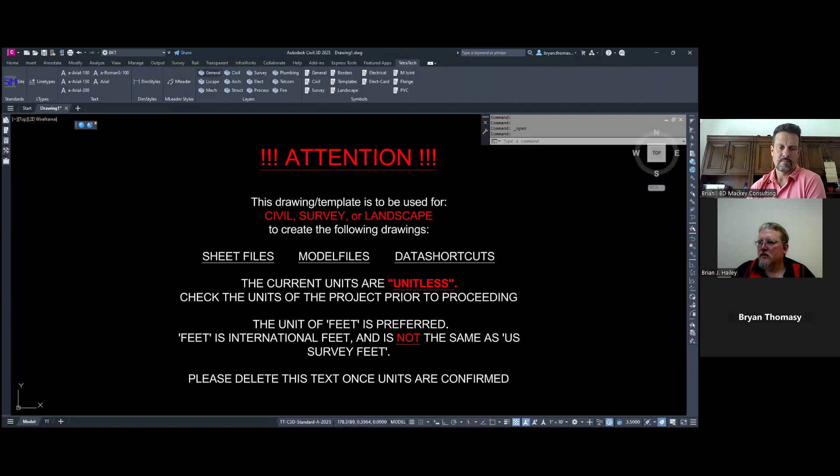So correct, within ours, all these open up. These are our layer commands or our multi-leader. And when we select it, it brings up the appropriate file with the appropriate layers within it. Same with multi-leader, it'll go to the correct location. Nice. If we take a look at these guys, let me see. Sorry, it's just been a while since I've modified these things. I believe I've got to go into the CUI to see that. Yep. Here, I'll try to do that. Brian, you lead, I can walk you. Yeah, because it's been about 7 years since I got into this.

So do you know which CUI file they're in? Yes, I do. They would be in our TTCAD. Okay, so what you can do at the top where it says all customization files, hit that pull down and then choose that CUI file. It just makes life a lot easier. Fantastic. And then you should be able to go find the tab. Actually, you want to go to panels. Oh, panels. Sorry, thank you. So let's just go to layers. Here, let me see if I can make this large enough for everybody to be able to see.

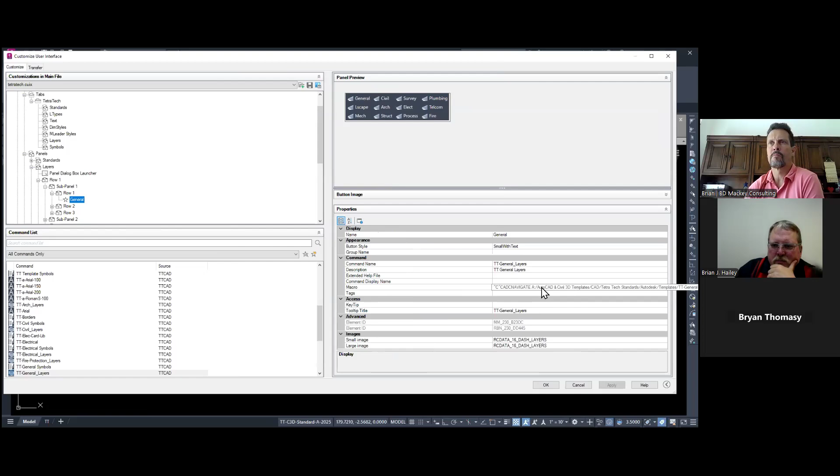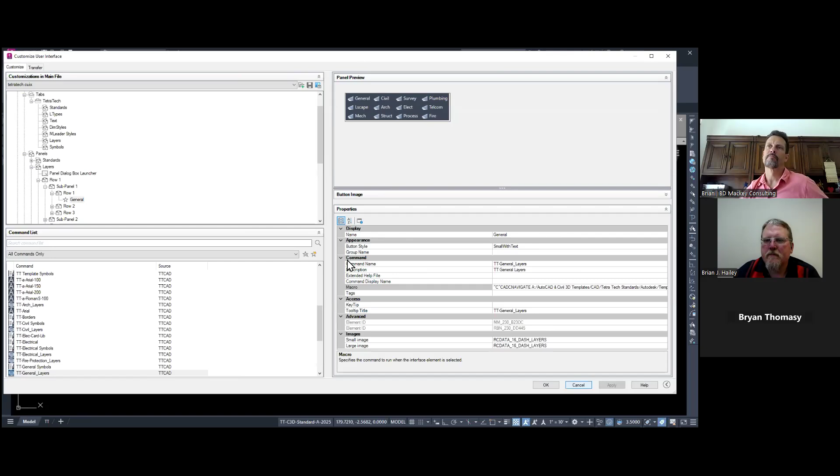So it looks like it's CAD navigate is what the command is. No, it's Control C, then it's ADC navigate. Thank you. You're welcome. Yeah, Autodesk Design Center navigate. And then you put in the path name. Yep, that's cool. And you can do that with practically any of them. We love the Design Center and the fact that it makes just getting stuff so much easier and faster. Add layers, and now it's in there. Yep.

And we are at the bottom of the hour. Look at that timing. All right, I'm gonna stop my sharing.